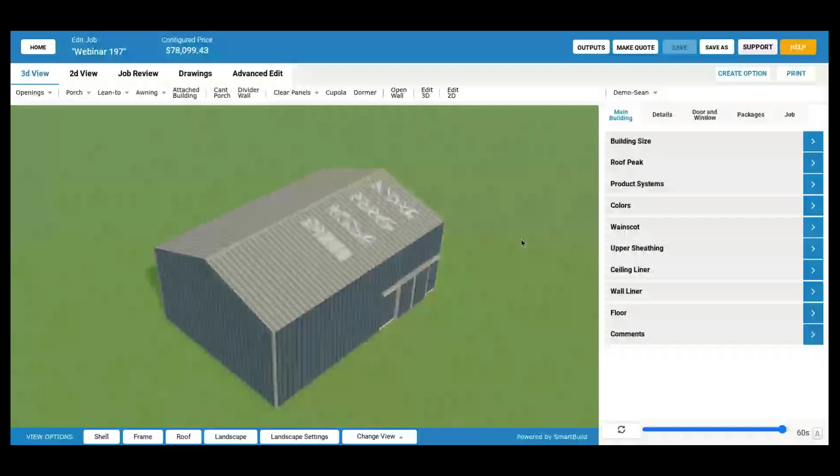All right, so I'm going to start in a job, and you can see a simple building here. I'm going to get out of this job in a second, and we'll go into the settings to see some important setup. The idea is to demonstrate these to you, but also to give you a roadmap to be able to set these up yourself.

Also, like Keith mentioned, this is on the beta site. I am on my beta site here. This is not going to be available to you on your live site until next week, and we'll keep you posted. If you do want to go into beta, you can do that right now and play around with this stuff on your site. You can see up here, it's the same address that you go to, but in front of it has beta. You should be able to log in like you do for your normal site. Just be really careful that you realize you're working on beta. Anything you do here is obviously not going to be on your live site, so you want to make sure to keep track of that. I'll demonstrate these a little bit. You can go play with these on beta, and then next week you can actually have these available on your live site.

As you can see here, I have some skylight panels. And if I flip this around, I do have some Eave Light clear panels as well. I'm going to show you how I set these up.

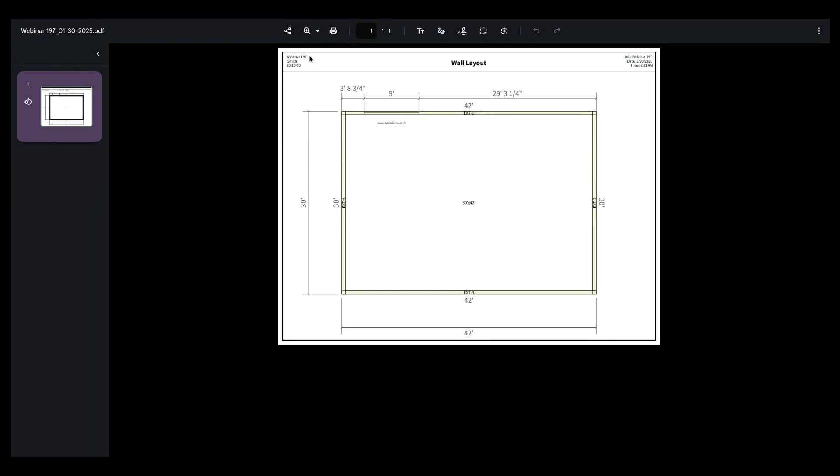This is the typical information that we've provided in the past: job name, the date, and the time. I just realized I kind of doubled this up, but this again is the project name. This here is a customer name, and this is the loading for this job.

So on the left side here, that information can be customized by you now. I'll show you how to do this in a second, but where those are coming from, I'm going to go back to this job. I'm going to go over to the job tab, and you'll see that this is the project name, that is the customer name, and this is the loading. So I went in and customized that particular wall layout to have this information show up on the left side. I didn't have my logo in there, but you can get your logo to come in there.

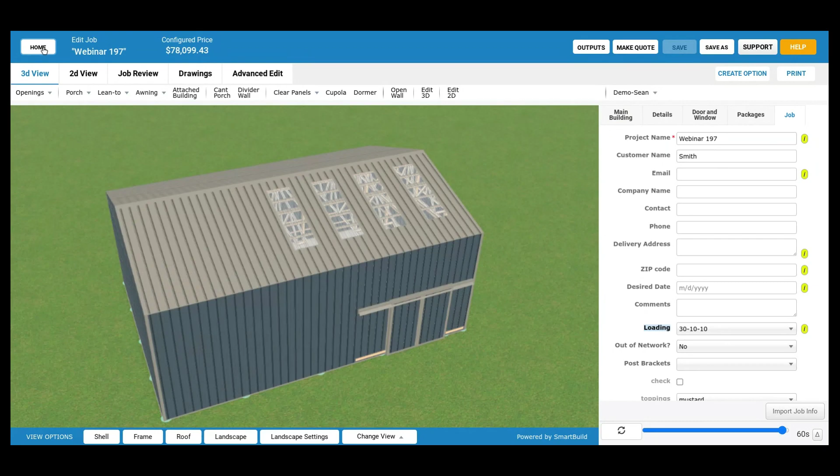So I think here in the job, I just wanted to do an intro and show this output. At this point, I'm going to jump into the settings so we can dig into this a little bit. You saw those clear panels, you saw the colors and the panels that came in there.

The way that you need to set this up to get those clear colors, it is a color. We have this set up so you can apply a color to a panel, and you can now have transparency as part of that color. So the first thing you want to do is add a color for this. I added in just two here, this bronze clear and then just clear.

And if we go in and edit this, this is the color code, just like we've set up the other colors. And then the new thing we have here is this color transparency. So 0 is going to be solid, just like it is for all the other colors, but you can go up to 100% clear. I did 70% in this case.

And actually, this clear panel here, that one wasn't quite as clear as I wanted it to be. So I'm going to change this to 85%. We'll see how that looks. You might have to mess around with these a little bit to get something that works for you, but you can come in here, create a new color, and define this color and the transparency. You can do that for any colors. If you have these already existing, you could change those up, just go and edit those, or you can add brand new ones.

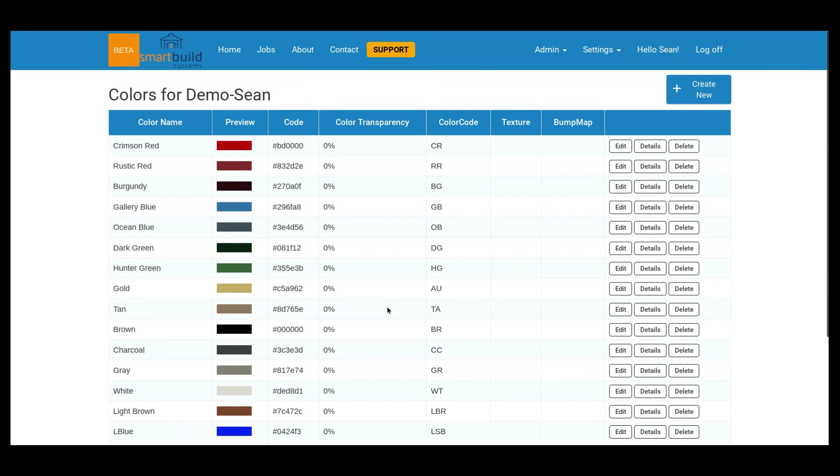Yeah, and I could have gone into the setup wizard here as well. So I'm gonna go into the setup wizard, and you can get into the colors here, same kind of thing here. You can put in that color transparency here and do some of the work here. You can also apply them to systems if you want to do that. So first thing you want to do is the colors.

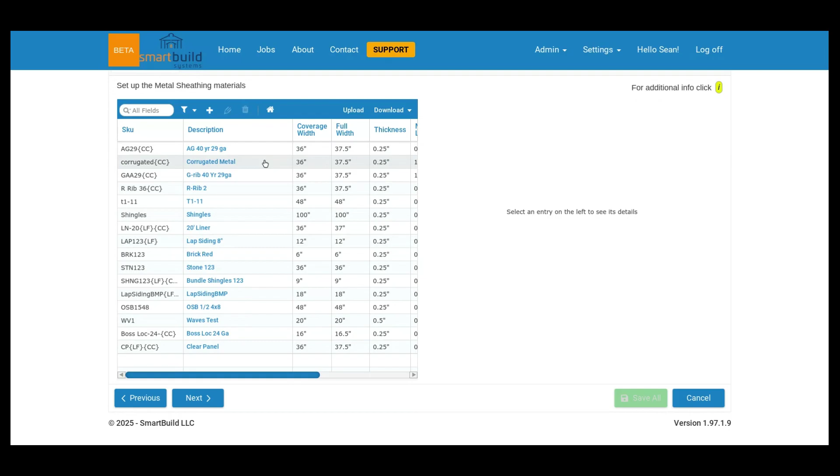And then if we get into the actual clear panel material itself, those are going to fall into the sheathing category. So I have some other sheathing materials in here, and you can kind of hijack some of these other materials if you want. You could add clear panels to your other materials that already exist. The thing you're going to run into there is you could add your clear colors as options to any of your existing panels. But what you're going to run into is if you go to set up like an Eave Light, you're going to have options of all the different colors and then probably some that you have that are clear panels.

So you can kind of just add these onto your existing panels, but probably what you want to do is I added a brand new material here, and I just did kind of a generic material clear panel. Just like any other sheathing material, I added this in as clear panel. Whatever you do, you probably have more specific types of materials and panels that you use, and you may have more than one of these. You can have as many as you want, but I just set up this clear panel as a lineal footage item. It's going to have colors, and it has the same coverage width.

In this case, I was kind of matching this up as a corrugated look to it. But it has the same width as these other panels, and that is going to be important. The widths of these do need to match up with whatever you're using for your roof or your wall. So I set up the coverage width, the full width, the thickness. This is just like the other sheathing materials.

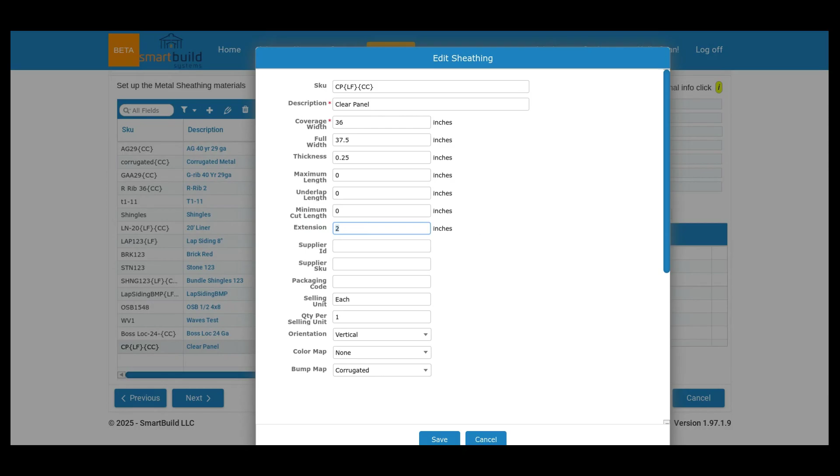And then it's going to use that in order to, in my case, I have a couple different panel lengths, I think 3 foot and like 11 foot for these panels. It's going to figure that as it tries to consolidate those into a panel that it's going to put onto the material list. So this is kind of like a margin, where you can kind of get some additional length for these beyond what the purlins are going to dictate. But I think we probably need to get more specific with those in terms of how far at the top it's extending and how far on the bottom. We probably want to get those into the 3D model. I know we have some work to do here, so we'll take a closer look at this, but that's an area that we're requesting some feedback.

The only other thing here is this corrugated look. You can put in different bump maps for the look of these in the 3D model, so you'll see that has a corrugated look once we get into that.

We also have usages specific to skylights and eave lights. For this specific clear panel material, I'm applying it to be used for both skylights and eave lights and none of the other stuff. That way, when I go to put in a skylight or an eave light, I'm just going to be looking at this material, and also these colors down here, which will be that bronze clear in one length, and then I have the clear in a couple different lengths here.

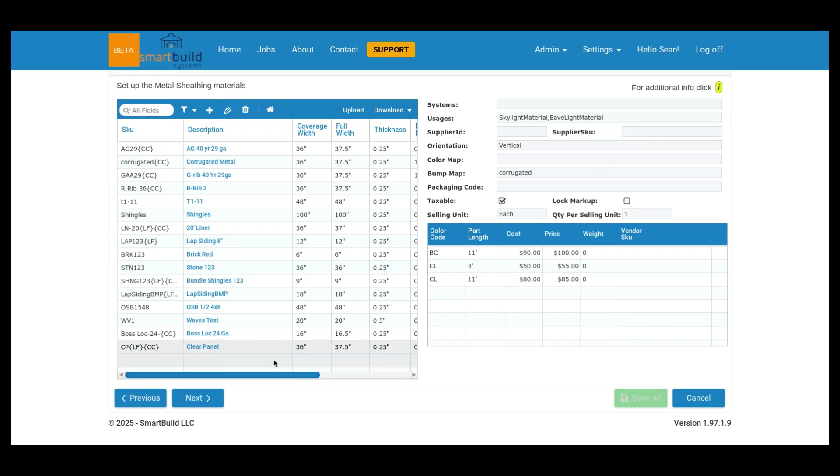So another thing to think about: you might need to go into your framing rules and set up some defaults. But the high level process here is you set up those colors, get some transparency, then come in here and set up one or more of these clear panel sheathing materials. Once you save all those, they will be available for you to use.

So that is the setup for the eave light and skylight. We do have a more detailed document, and we do record this webinar, so we'll have this available. When the time comes for you to get this set up, you can refer to this, and you can also utilize our support to help you get it set up.

One thing I'll do here, changing gears a little bit - I think I'm using this G-rib material. This is going to come into play with something I'll show you once we get back into the model, and that is automatically adding some purlins at a splice in the roof panel.

If you have a maximum length for your roof panel, in this case I just did 10 feet. Be careful with this - this is inches. It's pretty easy to cruise through this and put in like 10 feet, and then you'll actually get 10 inches and end up with a bunch of little panels.

The maximum length in this case for this one I put in here is 10 foot to demonstrate this. That means on a roof, if the length of that panel is going to be more than 10 foot, it's going to cut that panel off at 10 foot, and that's going to continue another panel.

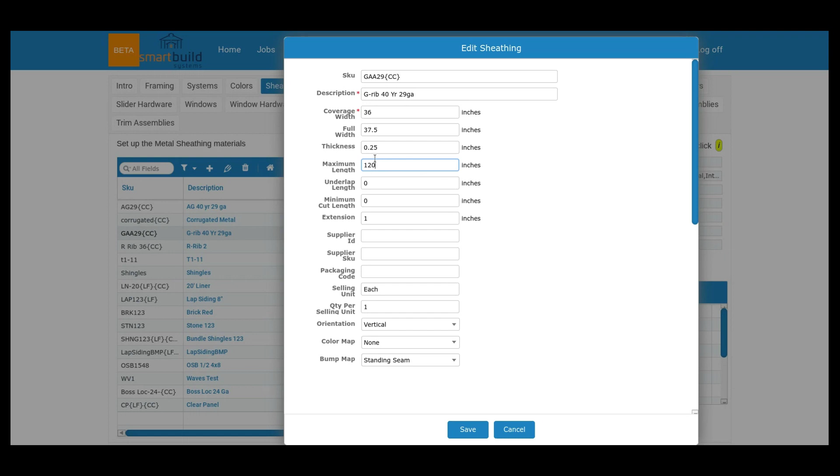That is available right now, but what we've done here is made it so it can automatically put in a purlin splice. So when we get into the job, you'll see that this panel is split at 10 foot, and there's going to be a row of purlins running across there. So while we were in here, I wanted to point that one out.

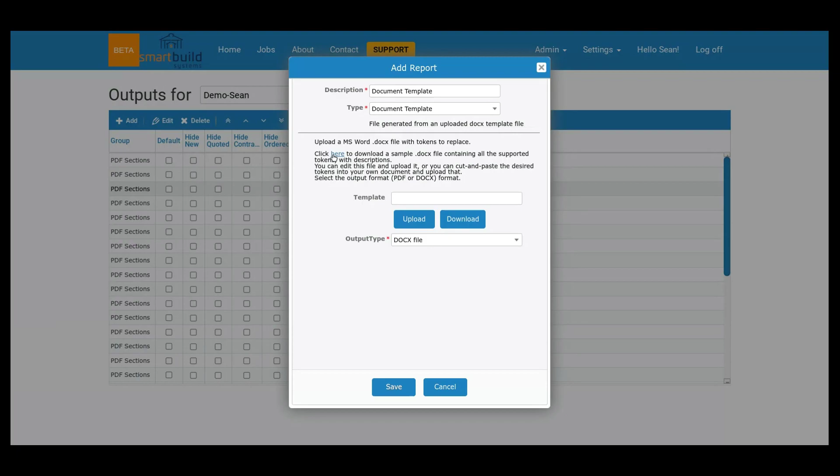I'll share this tab and you can just grab these and copy. Then you can come back over and I'll share this tab again. Once you have that document template downloaded and open, you can copy and paste those. I'll go back to the wall layout, and here are these three header lines where you can paste those tokens.

So I had that project name, which is probably redundant, customer name, and then I grabbed the loading. It showed the project name, the customer name, and the loading when we opened up that job. These are just going to fill in these blanks with job-specific information coming from your job tab. I didn't include the logo, but you can include that.

You can do a PDF or a DOCX file if you want, and you can do that for a lot of these drawings. I think almost all of these construction-type drawings—layouts, drawings, cross sections. If I open up the post layout, the same kind of thing is going on here. Even the elevations. So all of these PDF outputs can be set up to have that customized information coming from your job tab.

The one other thing I wanted to point out is that we had a request to make this roof report consistent with the other drawings, and so we did that. You'll see that...

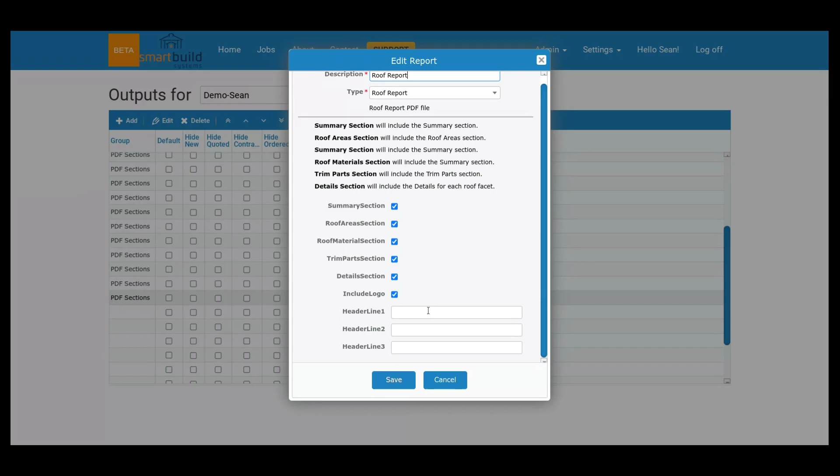If you don't put in these header lines, you're going to get what you got before—that was our standard information showing up on the left. Now, if you put in these header lines, you'll get those in the top left corner header, and on the right you'll get our standard information. So we've made all these layouts and construction drawings, including the roof report, consistent.

So thanks, Megan, for suggesting that. We cleaned some of that up, and then we gave you those job tokens in those header lines for some more customization.

I think that's going to be it here in the settings, so definitely a little bit of settings work required. I'm going to hit home, and then go back and edit this job. It's going to take a second to load up this job, load up the 3D model, load up all the pricing, and we'll get into a couple different things here.

One thing I'll show real quick is that purlin splicing for the panels. Okay, there we go. There's a kind of strange purlin line running across here, and that's from that panel length.

So there's just a new checkbox here. If you go into the details, this is optional—it won't affect you if you don't want to use it. If you're doing longer lengths or commercial-type roofs, you might want to come in here; it's this checkbox, 'add purlins at sheathing laps.' So when it's reaching that maximum length on the panel, it's going to throw in a row of purlins based on how your purlin is set up.

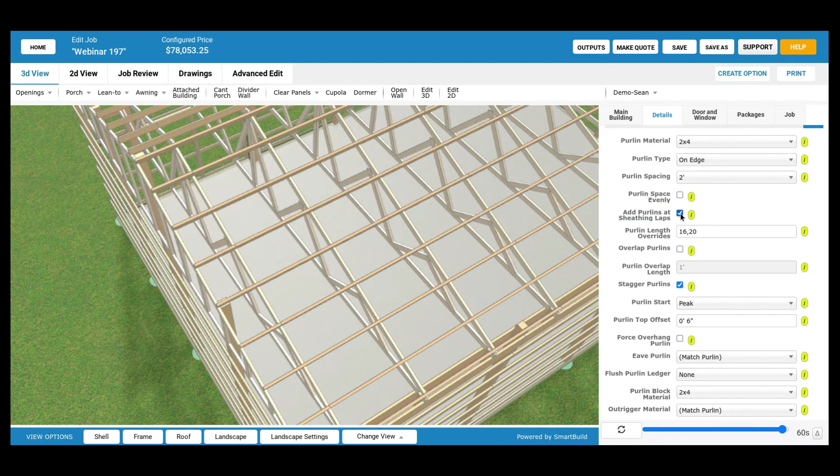If you turn that off, it's just going to get rid of that. If you don't use this or don't care about it, it's not going to affect you—you don't have to worry about it. But you might want to go into your framing rules and set this up as a default if that's something you run into. So just wanted to point that out real quick.

I think the other part I want to touch on real quick, before we get into the clear panels because there's quite a bit to talk about there, is just pointing out a couple things that we did with sliders. I think it's a smaller subset of customers, but it might be stuff you want to use. I don't want to spend a lot of time on this, but a couple things here.

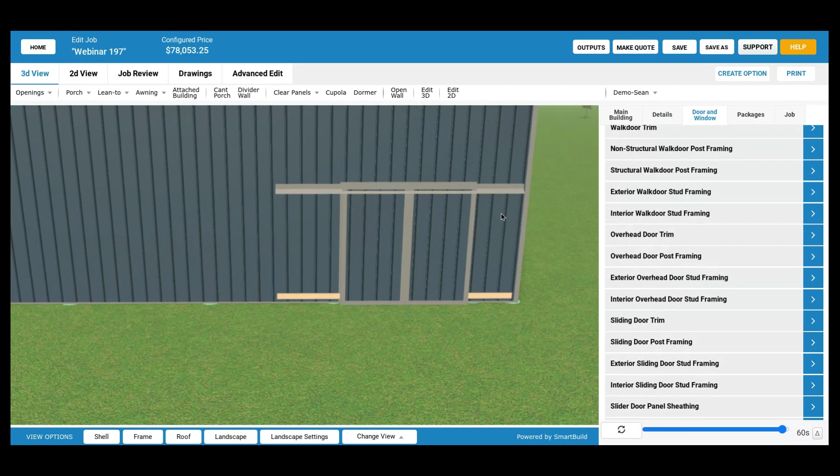One is we have a slider track margin. So if you get this close to the corner, we have the ability now to kind of hold this back. As you can see, it's a little bit longer opening this up over this way than it is this way, and maybe you're okay with that. Instead of extending this out or trying to figure it out, we've given you some control over the distance you can put here.

This is going to be under the slider door, or I think it's under the panel trim, so a lot more settings for you, quite a few settings. That is this distance here, called the exterior corner buffer length. It's just holding this back - that's 6 inches here. If I get rid of this, it's going to just extend that out, which is the way we do this now.

But if you do put in any sort of distance here, if you do 1 inch, it's going to hold that back 1 inch. And you can see that's going to affect the track cover as well as the track board and some of the other framing involved with that, so it pulled all that back. If you run into that situation, that's something you have some control over at this point.

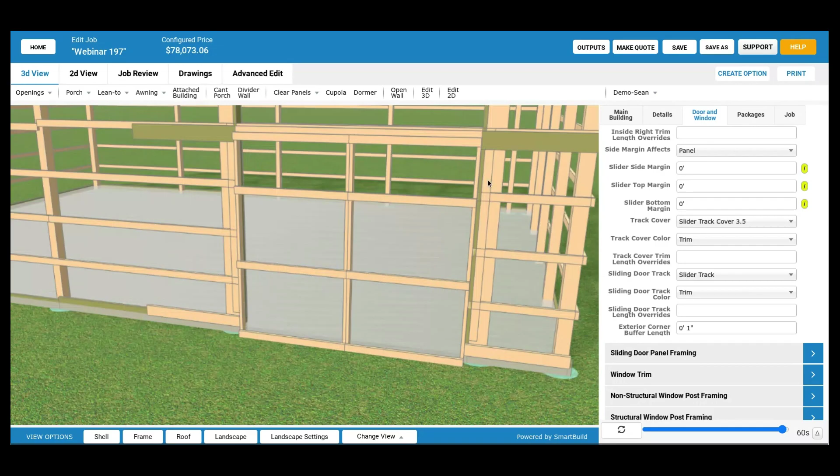The other thing that we did here is you can see I have 2 different materials here for this track board. So that is an additional setting that you can define if you want to have different materials at this location.

This is going to be under the slider door post framing. And if we come down here to track board, I have a 2x4 here, and then we have a track board extension, which is a pressure treated 2x8. Now we have these 2 different materials you can set up, with the lengths associated with them. So if you do have different materials here, you can set this up to automatically put in those different materials. That's just a request that we had.

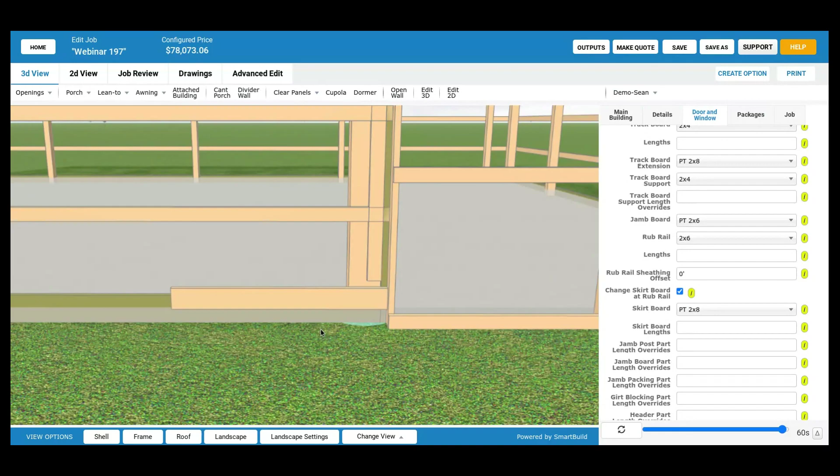The other thing, kind of similar here, still under the slider door post framing settings, is the skirt board changes. As you can see, this is at the rub rail specifically, where I have a different skirt board where the rub rail is at, though it is running all the way to the next support here. So I have a pressure treated 2x8 at the rub rail at this point, and then for the rest of this, I have like a 2x6 skirt board for the rest of the building.

So if you want to have a different skirt board at your rub rail for the support of some of the mechanics there, you do have that option now. These are things that you can go into your framing rules and kind of set up some defaults.

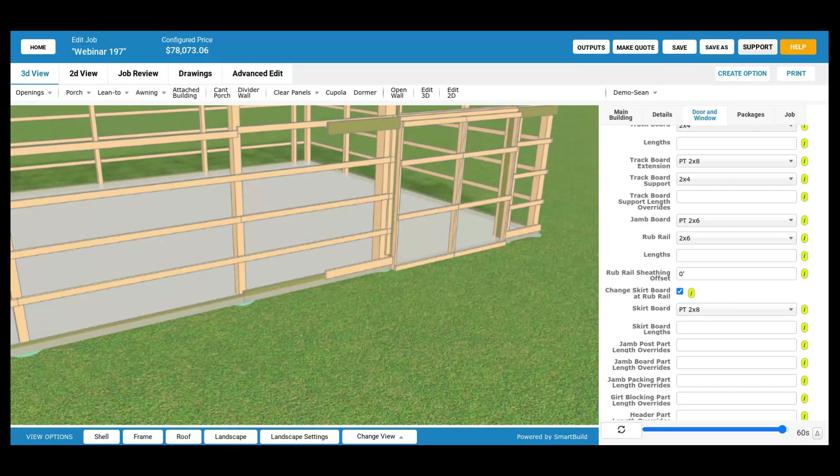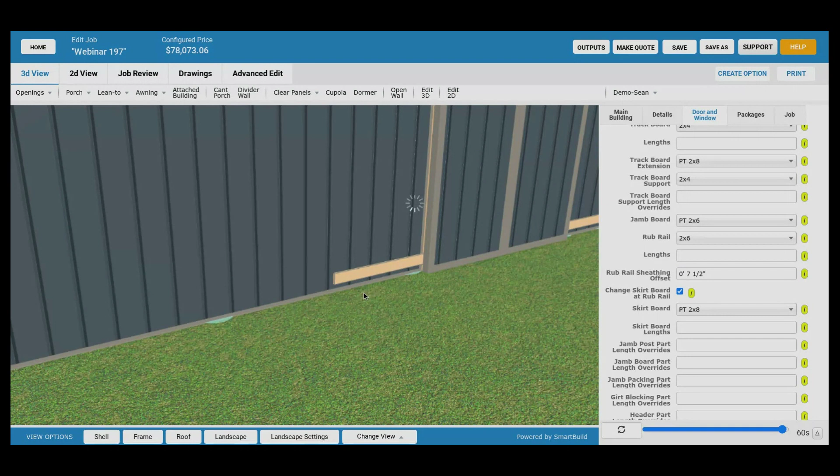Okay, last thing here on this is there is a rub rail sheathing offset. If you raise up the bottom of your panel at your rub rail, you can do that. So if we put in a distance here, then at the rub rail it's going to pull up the bottom of that sheathing. You can kind of see it pulled that up over to the top of that rub rail, so that's another option there. If that's something you do, you can set that up as your default, and it can automatically raise up the bottom of the panels at the rub rail.

And then you can see we have that board sticking out - you can turn those off. So I'll turn that off. We can see a little bit better here.

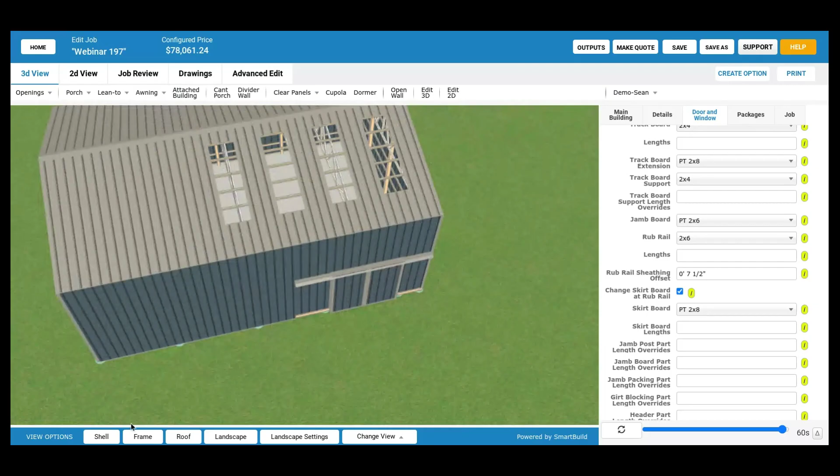And we'll start with the eaves. So there's a couple rules here. This is another area to get some feedback on, but we put both of these underneath the clear panels. So we have the Eave Light and the Skylight.

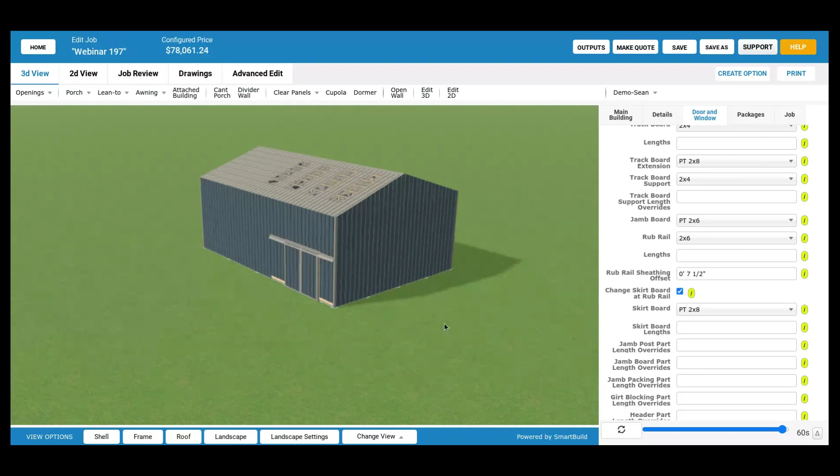The way that you input these is you click on whichever one you want to put in, in this case the Eave Light, and you'll see you get a note that you need to click on a wall to put these in. A little bit different than what we've done on the attached buildings. Also with the upper sheathing and the wainscot, it's a little different. You'll have to put these in as individual walls. That's an area where we can get some feedback and make some changes.

But the way this works now is you click on a wall, and once you click on that wall, you'll get these input parameters, and you see you get some sort of a preview. So right now on this gable wall, the defaults, it's looking at this offset down, and it is coming down 1 foot from that peak.

Doesn't necessarily make a lot of sense for the gables, but you can see when I put that as 8, it's going to drop that down 8 foot. The height is going to be this length of the panel from the top, where we've offset it down from, to the bottom of the panel. Right now it's 1 foot. If we do 2 foot, it turns into 2 foot. At 3 foot, you get a 3 foot panel, which is what I've done here.

Let's see, what would be the math on that? I guess I'm not really going to try to match these up right now. I brought that down below the truss carrier.

As you can see, I have that one material here of clear panel. That is the material we looked at in the setup wizard that I set up specifically for the Eave Lights and Skylights in this case. So you could have separate Eave Light and Skylight materials if you wanted, or you can choose none. And those colors are showing up here, that bronze and that clear.

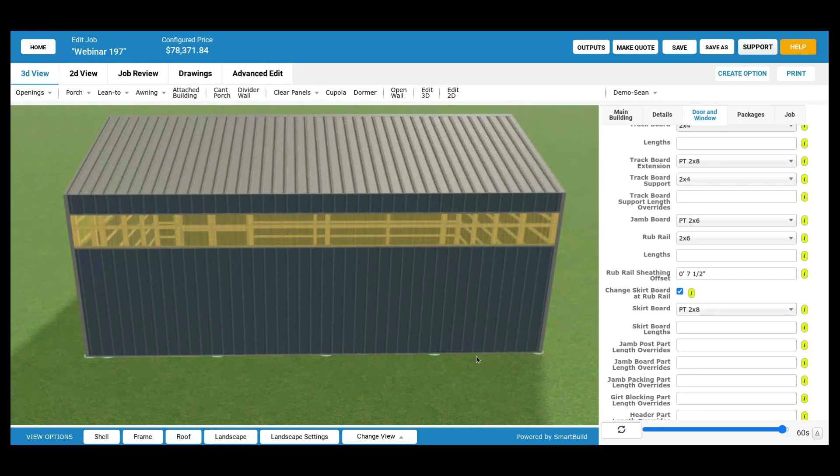In order to edit these, you can go to Edit 3D, and you'll see you get that as an option. There are going to be some situations on the roofs, mainly I believe where you get into a porch that has skylights, where Edit 3D can get confused, or where you have a couple different things that could be selected, like you could select that porch or you could select the skylight.

If I click on Eave Light here again, I can't just select this existing one to get into the edits. So you can either go to Edit 3D, or you can go into a specific Eave Light or Skylight to select those. That comes in handy on the porch where you have the skylights and you need to select that specifically. Something to keep in mind.

So when I hit edit on that, it does pull up the same input screen, and we can make changes here to this existing one. We have this full width checkbox, which means it's going to put it all the way across. That's what I did on that gable wall, but you can uncheck that, and then start to play around with where these get placed.

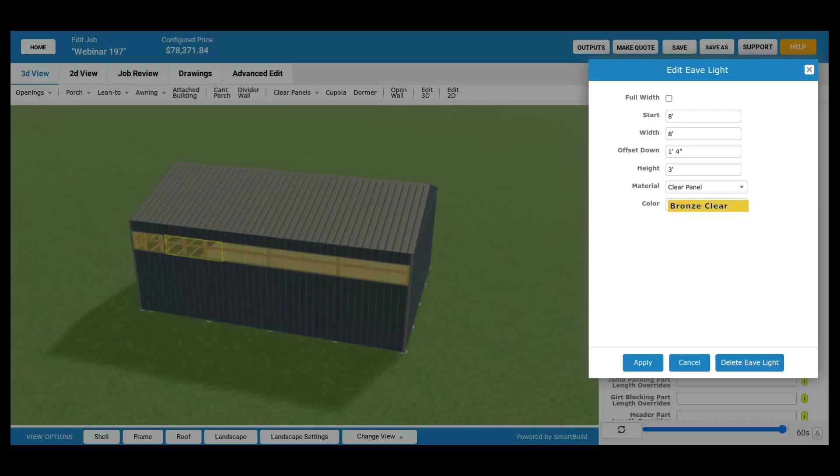And there are some rules. You'll see here I have this starting at 8, which is kind of the default, and we do get this preview. The thing about these starts is that they're going to be based on panels. So you cannot put an Eave Light or a skylight in the middle of a panel. It's following the panel breaks across the wall.

So if I put in something like 9, it will bump me over in this case. If I put in 1, it's going to put me all the way to the end of the wall because that's where the panel break is. A value of 1 wouldn't let me put it at 1 foot because it'd be in the middle of a panel. If I put in 2, it's also not going to do anything, because we're getting to the 3-foot panel width, that's where these panel widths become important. Now I have a panel starting 3 foot from the end, right at this panel break here.

The width is going to do something similar here. I have 8 foot that's coming across. If we put in like 9 foot, it's not going to do anything again because it's going to want to fall onto a panel break. So if I put in 12 foot, it is going to let me put that break there.

So you get these previews. The offset down here is from the top of the wall, works very similar to the porches. So you can really put that wherever you want, including 0. And then again, this height is the length here. We changed this to the height, so that's going to be like the height of this panel.

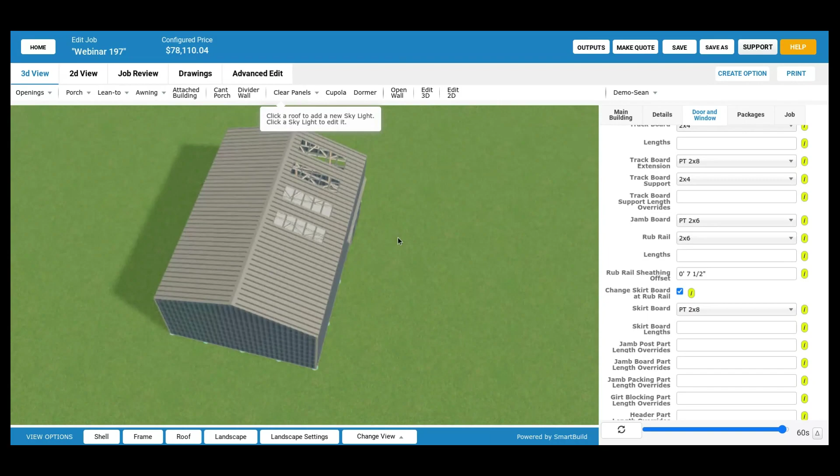For skylights, similar thing. You do have to click on a roof panel, and these are individual roof panels. If I click on that one, this gets more into purlins as well as the panel widths. On the walls right now, we are not limiting you in terms of where the girts are. That might be something we want to change. That's a place for feedback. Up here on the roofs, you are going to be limited by the purlins.

And so I have this offset down of 3 foot. Again, this is something where you may not see changes here. I changed that to 2, and the preview didn't change. I have 5 foot purlin spacing, I believe, here, and I have kind of an offset from the ridge. So it's looking at those purlins and it's going to kind of lock you into those.

So some things are just not going to change. Even if we do, I think like 4 foot, that is going to get me into a purlin. The height of these, again, this is kind of the height from the offset down to the bottom of this panel. If I put in 5 foot, we will see a change there. I think if we put in 4 foot, it's going to bump us back probably to this 3 foot length. So these are going to be dictated by panel, or by the purlins and the purlin layout.

And also by where these panel breaks are. So let's see, if I start this at 0, it's going to kind of bump me over here to get into that left edge of a panel. And then again, we have the materials, we have the colors that we could change.

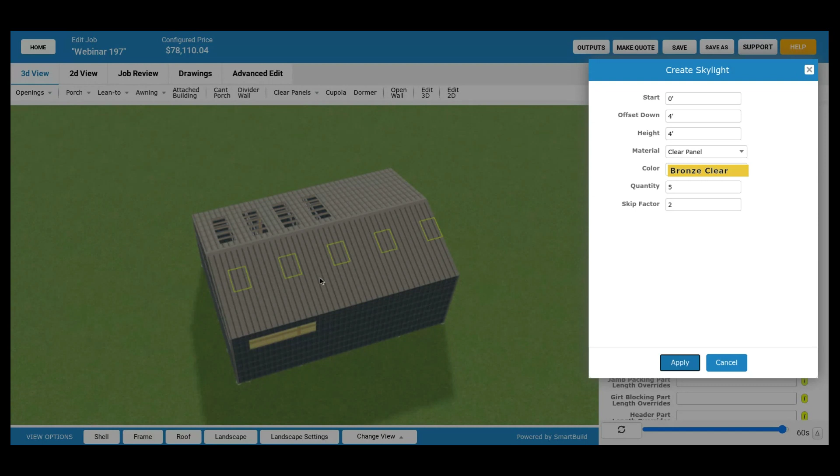And then once you get where you want it to be, you can hit apply, and it will place those onto the panels, onto the roof.

And then again, you can come in here and edit these either by 3D, and you do have to edit these as a group. That's just the way it works. If you click on this one, you're going to be editing all of these. So that's another area where you could potentially make some changes if you do need individual changes for these panels. We really don't have a way to do that right now. These all work as a group.

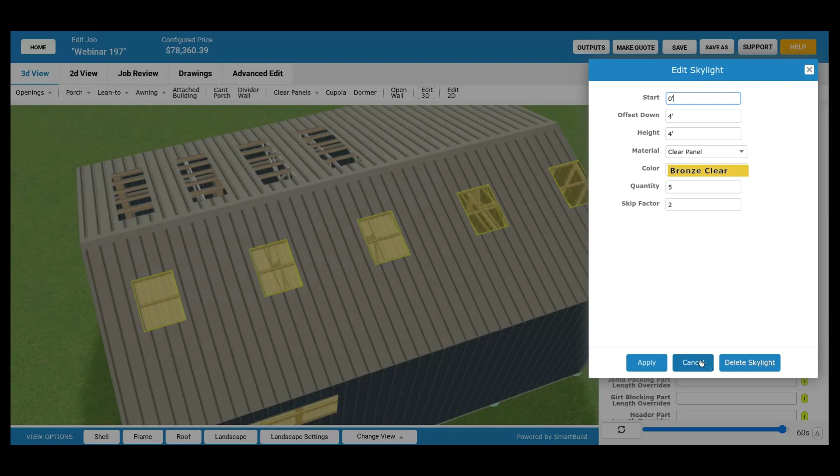You can put in multiple groups of these on a roof if you need to, so you don't have to just put in one group if you want to do some different things here. That would just end up being one or more groups of these panels with some different settings associated with them.

In this case, because I messed up my clear panels, I think we could go back and fix those. But if you do want to delete these, you edit them, and there's a delete skylight option here, and then it'll just ask you to delete those.

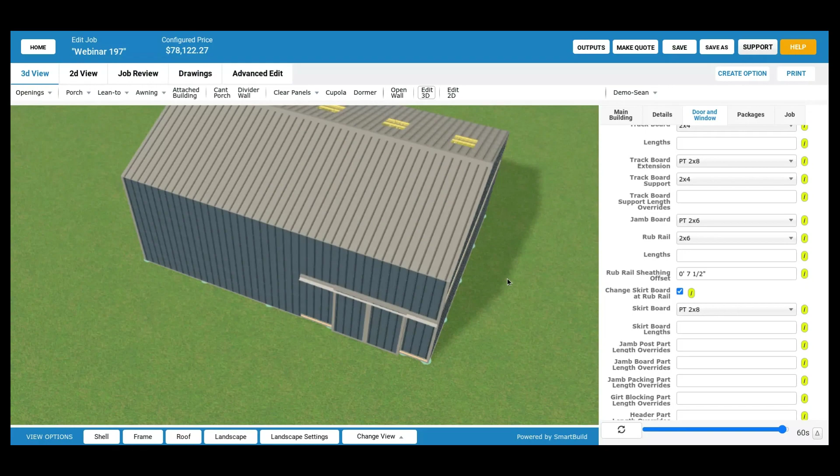So Sean, we did have a couple of questions that came up with respect to these skylights. Marlon asked, does anyone think it would be beneficial to add a control to easily line up the clear panels with other walls? I think what he's talking about is the issue you had trying to put the clear panel on the gable wall that lined up with the one on the eave wall.

Yeah, it's because we're offset from top. Marlon said matching the height on different walls.

Chris suggested having an offset from grade option would be best instead of offset down. We did offset down because looking at the buildings we saw, the eave lights tended to be up towards the eave, some distance down. It didn't seem like anyone was saying, 'Oh, I want these to be 12 feet from grade.' No, they wanted it to be 1 foot down from the top. That's where the eave light starts, and it's 2 feet high.

But having said that, we don't do this, you guys do. So like Keith said, we are very much driven by what you guys need. So that'd be a nice option there, from grade. Well, is it an option, or is it, no, change it from offset down to offset from grade?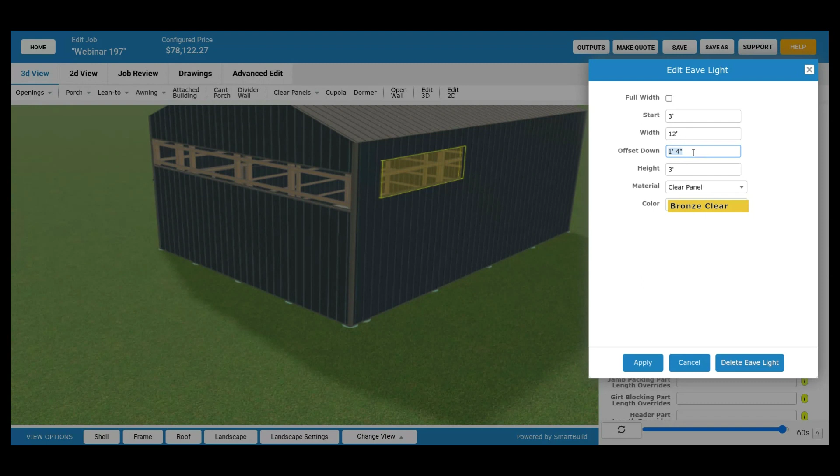Then they would all match. Can you set the offset down to be from the eave height instead of the peak? I think that's kind of what had been proposed. Bart says, can we have both offset down and from grade?

No, pick one. Of course, you can have both if that's what we need. If the prevailing sentiment is that it was always offset from grade, then we would change it to that. If the prevailing was no, it's always going to be offset from eave, but it's the same eave all the way around the building.

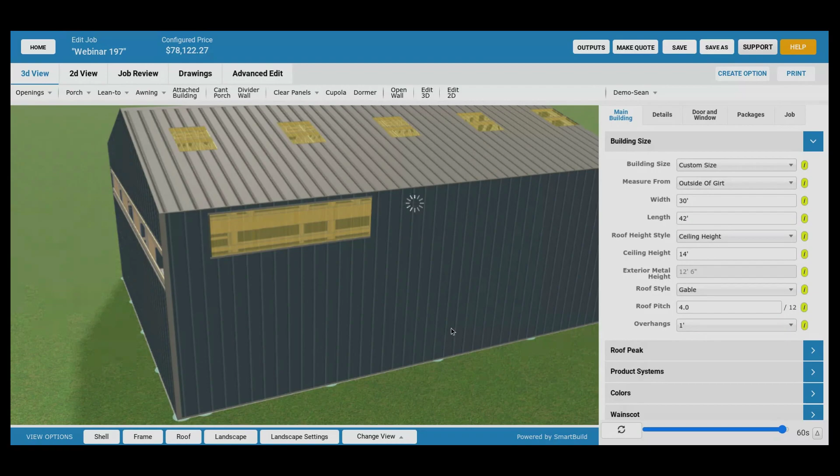I don't like giving you guys choices. So I think the offset from top of wall would be the best option because it's something you could set as a standard and you're not having to set it per job, the height. You have a building that was height. Yeah, that's why we went with offset down, because it just seemed like from all the pictures that we saw, the eave light is always some slight distance down from the top of the wall metal, and so I think that makes sense.

If we could just set that on the gable, the offset down would come from the short point of the gable or from some matching eave wall height.

It seems like when you have an overhang, it should be offset down from the top of the steel, and it doesn't look like it is. Is that right, Sean? Right. Well, no, it is from the top of the steel.

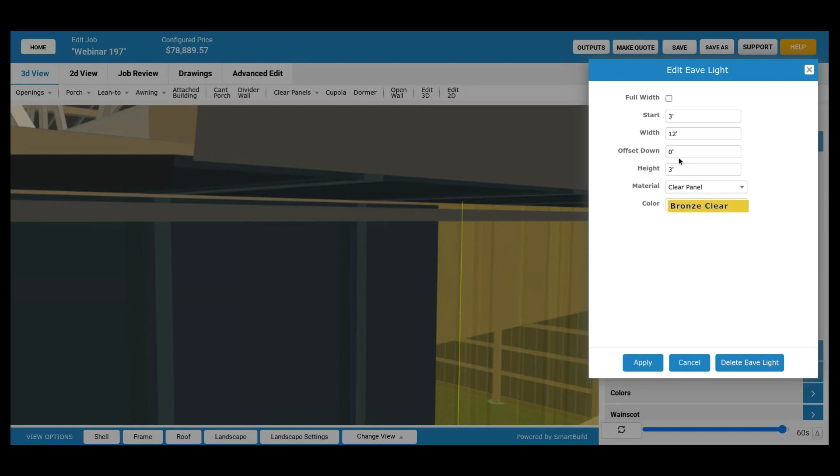Well, if you edit that Eave Light and set the offset down, what is the offset down on that Eave Light? It's 1 foot, right? It's offset down 0. Set the offset down to 1 foot, and maybe we were smarter than we thought.

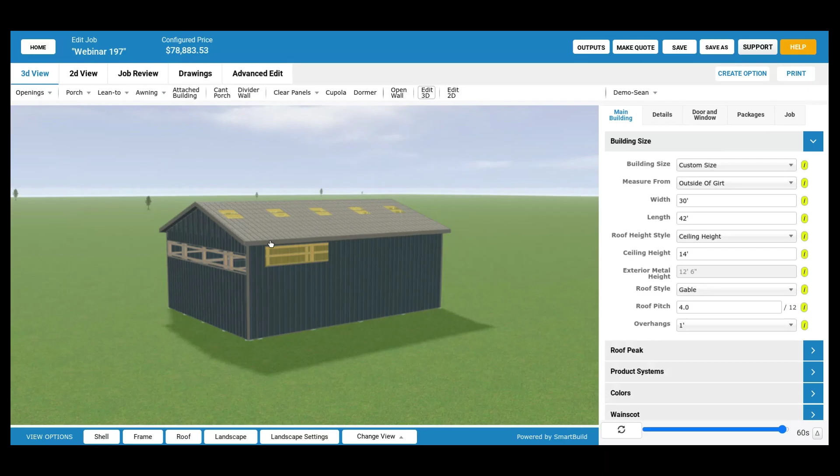Irvin is going back to the first girt down from the ceiling height for the top of the side light as our preferred position. If you do an offset down of 0, it should put the top of this eave light at the bottom of the overhang, or the top of the eave if you don't have overhangs.

I would definitely like to see it at the top of the wall sheeting. We typically put it at the top of the wall sheeting, and if we have that set at 0, then we put a 3-foot panel in. It's going to give us a 3-foot panel at the top of the wall. With a different fascia height or anything like that, it's going to change that offset. So I think top of the wall sheeting would be the target.

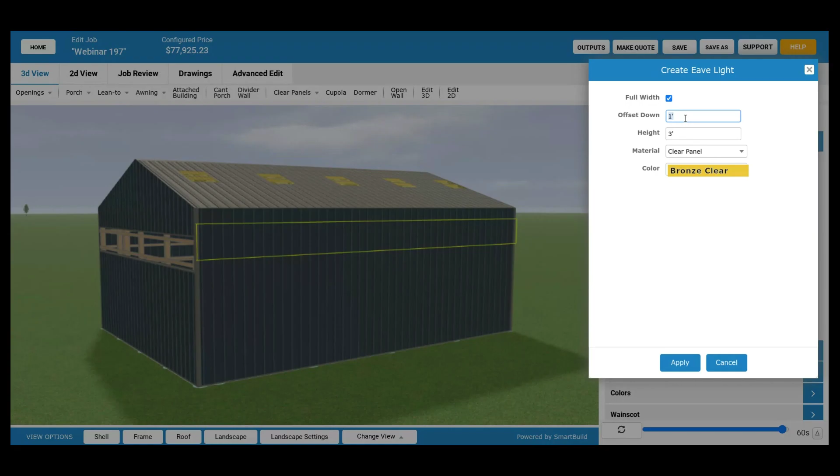Top of wall sheathing, yeah. Top of wall sheathing. Where that gets a little funny is if you do that and you have an overhang on one side and no overhang on the other side, you're going to have the wall light in a different place. So that sort of breaks the idea of doing it from a consistent place.

Where is this coming from? I expected this to be at the top of the steel. Where is that 0 from? Looks like something we probably have to look at. We'd have to look at it.

This is beta, yeah. This is why it's in beta, right? It's not the top of the truss carrier. It's not half ceiling. It's not the ceiling, so I'm not sure where it is.

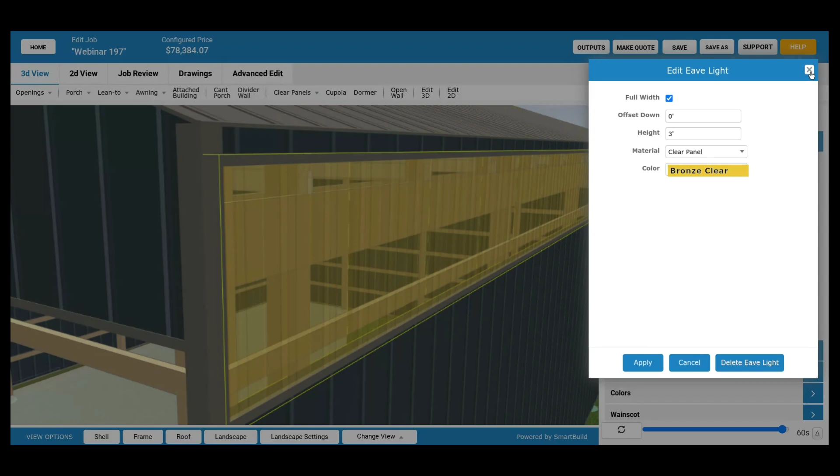Yeah, that looks kind of like a bug. So we would want to be consistent, and you'd want to be consistent on the eave wall with that. The tricky part is if you had an overhang on one side of the building and not on the other side.

On this side of the building, your offset down 0 would put you there. On the other side of the building, offset down 0 would put you down by wherever your soffit return is. And then on the gable side, which side should it match?

Something to think about. So like Irvin said, offset from grade would work best for him. That's what I've been doing with upper wall sheeting - offset from grade, and then I can place it at my first girt below the truss carrier.

Yeah, that makes sense, kind of like the idea of having both. Mark, it sounds like you don't like that, but... Well, yes and no. They both have problems, right? Offset from grade is really simple, it just means that for every wall you put in on every building, you have to scratch your head and go, okay, what do I want the offset from grade to be for this one?

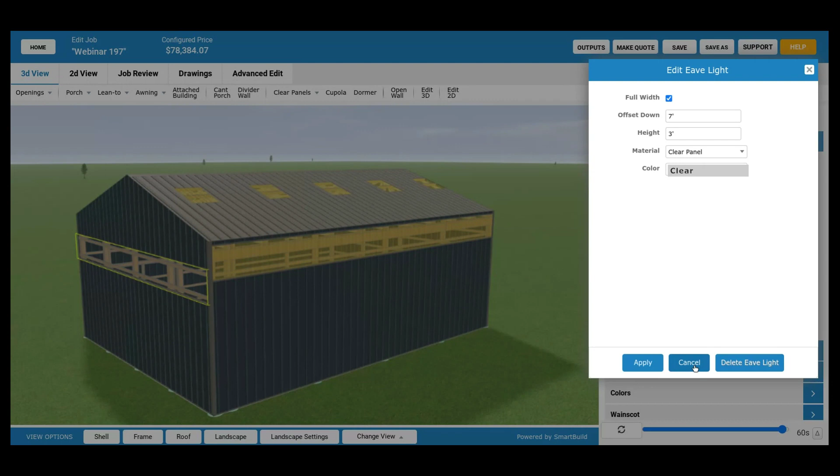And then we might have something with the gable. Or maybe that just falls under the offset from grade, or maybe something to match the eave wall. Yeah, then it gets a little bit fuzzy, because if your eave wall is top of metal, and the top of metal is different from the left eave wall and the right eave wall, which eave wall do we match?

Yeah, okay, I guess we're getting into a design session here. It's fine, I mean, I was done with what I was going through, so this is kind of the official time if anybody wants to jump in or whatever you guys want to talk about. We can definitely keep talking about these.

Maybe you should do a session and just invite people and go through some of these kinds of things. So we've got Irvin saying they always line it up with the girts, and Casey saying it'd be nice to not be pigeonholed to line up with the girts. So we've got people voting for both.

It sounds like if we had those three options for Eave Lights - the offset down, like we have now, but making it work correctly so it's always offset down from the top of the steel. And then offset from grade, so 9'6" - you want 9'6" all the way around the building, now you can make it consistent, 9'6" all the way around the building.

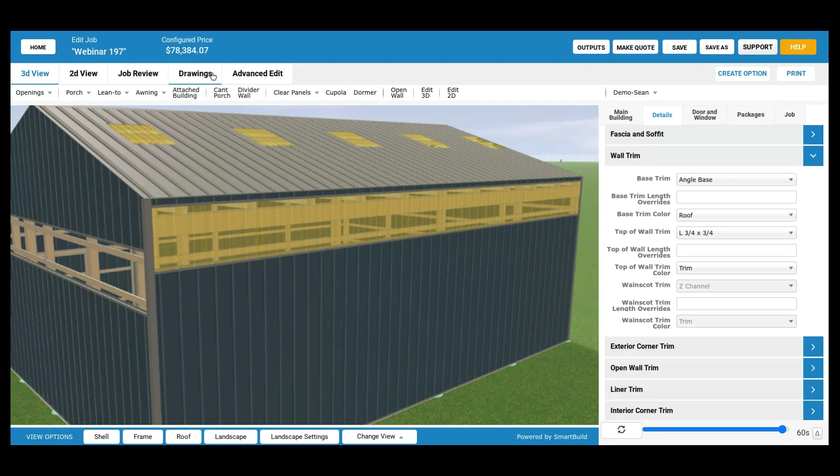If you don't have wainscot on a wall, you have some control over trim. But do we need an eave light trim, an upper and lower eave light trim? Yeah, I think we do. The problem is if you have wainscot on this wall and you want trim, but you also have eave lights, and if you don't want trim, some people don't use trim here. You can't have no trim up here and then wainscot trim elsewhere. So right now, if you have wainscot, you have to have wainscot trim up here, and you're limited to matching the wainscot trim.

So as a follow-up question, is it reasonable to assume that you're going to use the same trim for the eave lights, both top and bottom, as you use for the wainscot? I think in some cases, but some people don't use trim at all on the eave lights. Anybody can chime in, but as Brandon said, I would keep the trim the same as whatever you're using for the wainscot.

A long time ago, a lot of guys would sheet the entire truss area with eave light panels on the gable, especially in a horse barn.

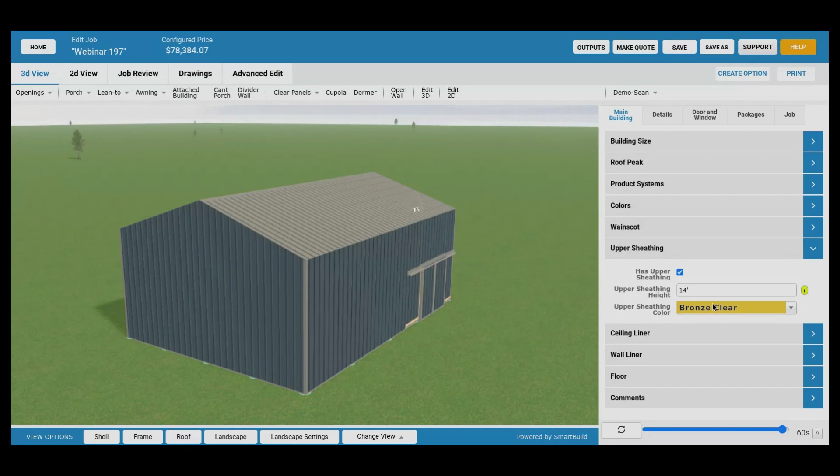What we do is you can take that clear sheeting, put it into your material colors, and for your upper sheeting, that would be your material that you use. Upper sheeting color is clear, so you could get that effect. Yes, you can get that effect by just doing upper sheathing and changing your upper sheathing color, or your upper material. I have those colors with these other panels, I think. So this would give you what you asked for there.

Realistically, for eave lights, if your eave lights are always at the top of the metal and you want offset from grade, then upper sheathing height does give you that capability. You could use that color for any of your panels as long as you're in the right system, you have the material set up and the color set up. So you would have to make sure that system you're using, whether it's G-Rib or whatever, has a clear panel that you can buy. Does that make sense?

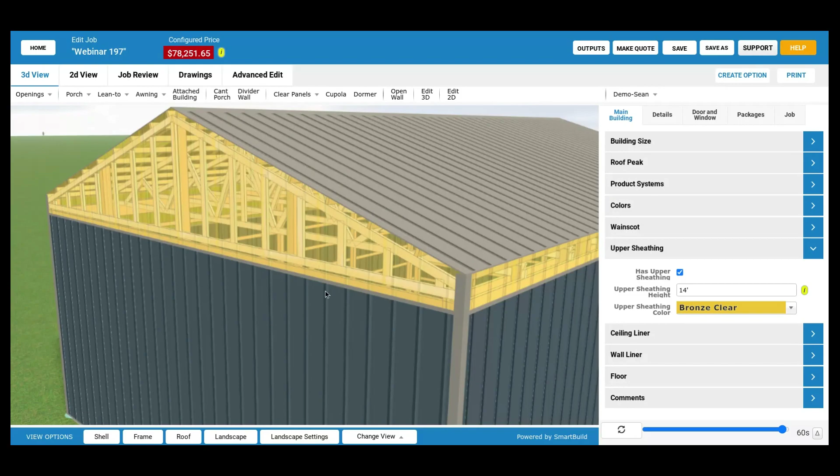One of the questions from Delmar is, what trim do we use on that upper sheathing? I don't know that we have an upper sheathing trim, do we? I think it's again the wainscot trim there. Well, we call it upper sheathing trim, but what are we actually putting in there? Do we have a setting for it? Go to details. It is controlled by the wainscot trim. Yeah, we just call it upper sheathing.

So is that a vote for a separate setting for upper sheathing trim, separate from wainscot trim? Yes. And the reason I say that, if we have a building with three colors, like a wainscot is one color, then your sheeting and your wall trims are a different color, you have the ability to set that upper sheeting trim to match the wall instead of the wainscot color. Who cares? Actually, we can't, because when I select that wall and change the wainscot trim to match either the wainscot or the wall or whatever, I think it needs to be controlled separately. So that's a vote for separate settings for wainscot trim and upper sheathing trim.

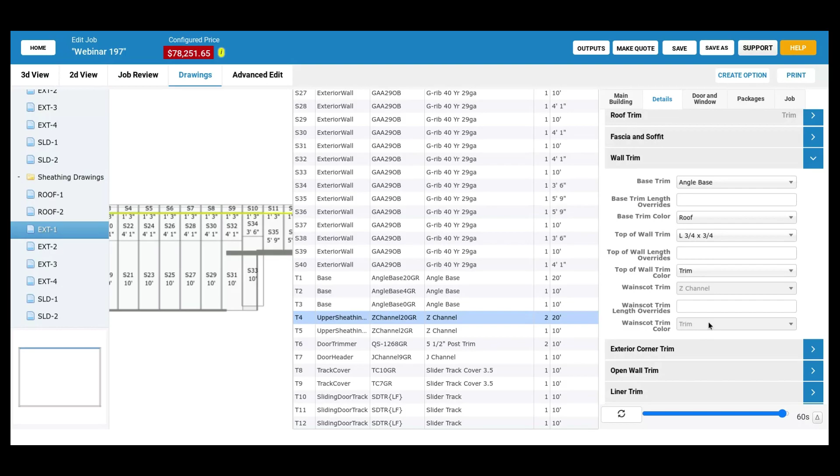So what I'm hearing is, as far as offset from grade, we have a solution for that: just use upper sheathing. You can select your clear panels as your upper sheathing panels, and that would allow you to get this effect. Now, if you wanted that upper sheathing band to go the same three foot height or whatever around the gable, you couldn't use upper sheathing to do that. You would have to calculate what the correct drop height is.

Not sure that comes up often enough to spend too much time on it. I think what we need to do is make sure that when you say offset down 0, it actually does offset down 0, and not give you this kind of mess. This is giving you both, and then...

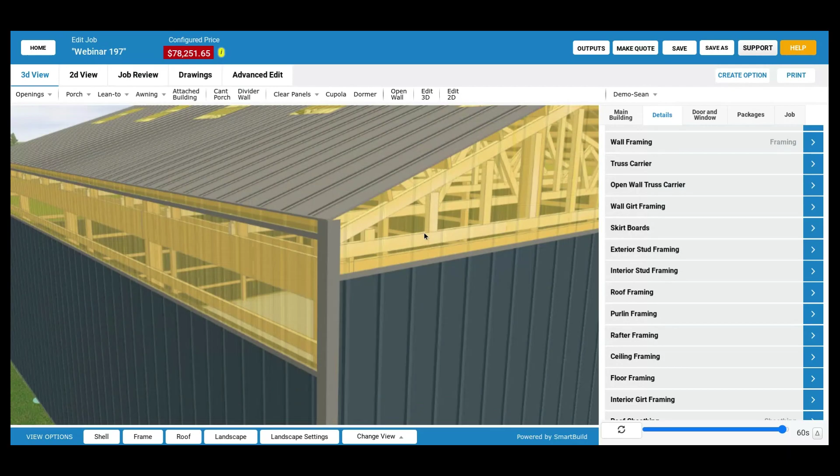It sounds like we also need a separate option for upper sheathing trim, like wainscot trim, and another one for Eave Light trim. Would it be the same trim on the top and bottom of the Eave Light, assuming it wasn't all the way to the top? I would say so. Brandon said just use the same trim that you use for wainscot, and that kind of sort of works, but not really, particularly when you have stone wainscot.

Yes, I think we can get this much better. I don't think that we're going to answer all of these questions, but I think we can get it to where it's going to work for 90% of the cases that people want to be able to use it. The other cases, they might have to scribble on a napkin or something to get the right stuff.

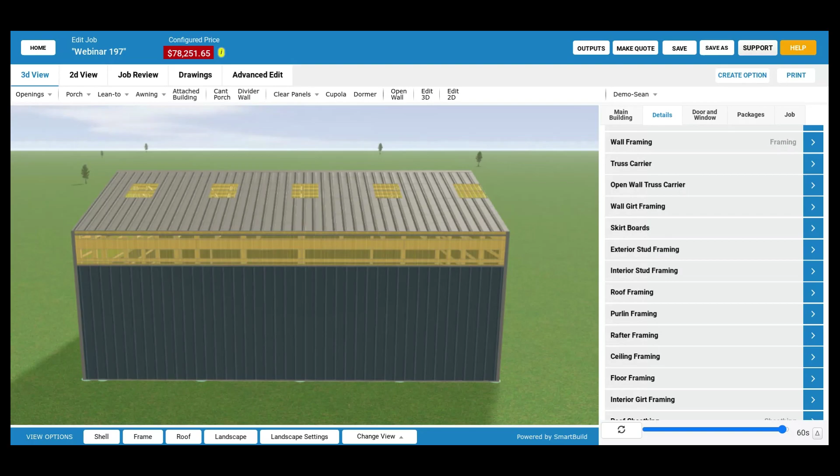The only thing I would add is on the Eave Light, if we have an 80-foot long building, and a 20-foot door in the middle of the wall, and that upper wall is full of header, it would be nice to be able to cluster the Eave Light similar to what you're doing on the roof, to apply 2 groups of Eave Light instead of a solid band. So you can group Eave Light on the left of the door and on the right, and not in the doorway.

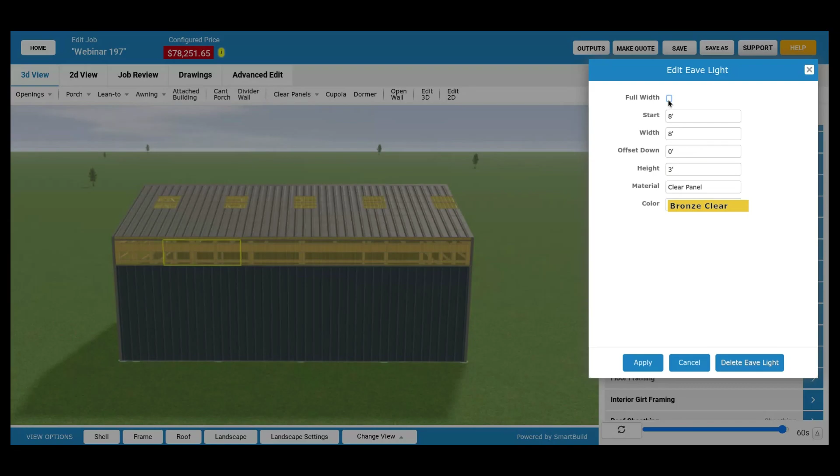We don't have that ability, but you can add 2 Eave Lights on a wall. You say 8-foot Eave Light on this side of the building, then a start point, and then an 8-foot Eave Light on the other end of the building. So your start point, full width checkbox, that's at 0. Then another Eave Light start at 16 for 8 feet. You got it, I missed the checkbox. You just have to do it as 2 separate ones.

You can also put an Eave Light at offset down 1 foot and then 3 foot high, and then another Eave Light offset down 8 foot that's 3 feet high. So you can do some really silly things with your Eave lights, but multiples that way. But remember, you're not going to be able to get things exact. It's going to be based on your panel widths.

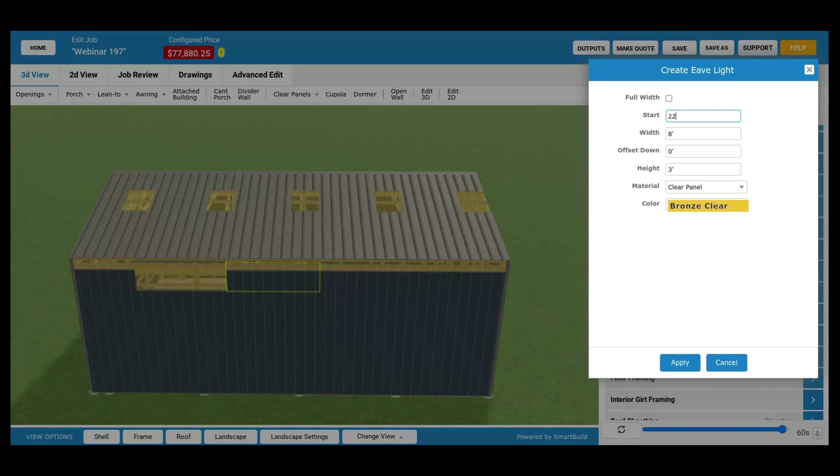Just so you know, I want it 8 foot here. Oh, it's not 8 foot, it's hanging over the door here. So you'll have to do some playing around based on your panel widths.

Yeah, because basically when you say I want an Eave light from here to here, what it does is say, all right, starting here and ending here, you're going to be able to see through the panel. Where do I start? Where's the first panel that has to be made clear, and where's the last panel that has to be made clear? Because what it does is it just makes the panels clear.

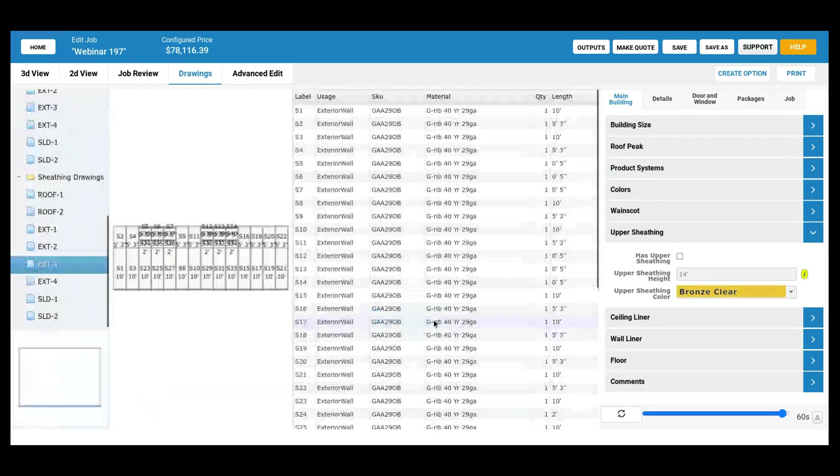So when you go to the drawings is where you can see it. If you go to the sheathing drawing for EXT1, EXT3, you can see what it did: S12 is what it was. S12 got broken into S12 and S30, and then S38 is the section, the 3 foot or 11 foot section in the middle. The 11 foot is the length, that's his panel maximum length, the panel length.

Just so we know, with that 3 foot section in the middle, it's cutting it out of an 11 footer. 4'2", yeah, so 4 foot was the height, and then you had the 2-inch extension. So 4'2", 4'2", cutting those out of there.

But yeah, back on the drawing, the dimensions you gave it were actually somewhere in the middle of S38, and somewhere in the middle of S38 to somewhere in the middle of S40. That's where you said you wanted your Eave light to start and stop. So somewhere in there is where you requested, and this is what you got. Hopefully that will help.

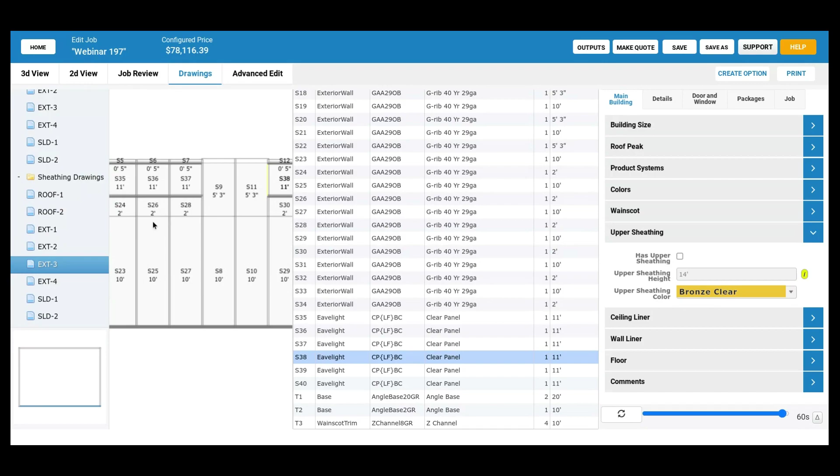Let's see, we had a question from Benjamin Oikel about changing the markup on starting models. I would reach out to support on that one, Benjamin. That's not really an issue that I want to talk about here, but support will definitely be happy to help you with that kind of question.

Chad asked about anyone having issues using the cant porch detail and then placing windows. We did have some issues with that which we've addressed in this sprint. As usual, we don't always talk about bugs we fixed in a particular sprint, but we did fix some issues with this sprint, and some of them had to do with the placement of windows.

So I would encourage you, if you're having issues when doing those kinds of things, to reach out to support and let them know what that is. That dramatically increases the likelihood that they will get fixed if we know that they're a problem.

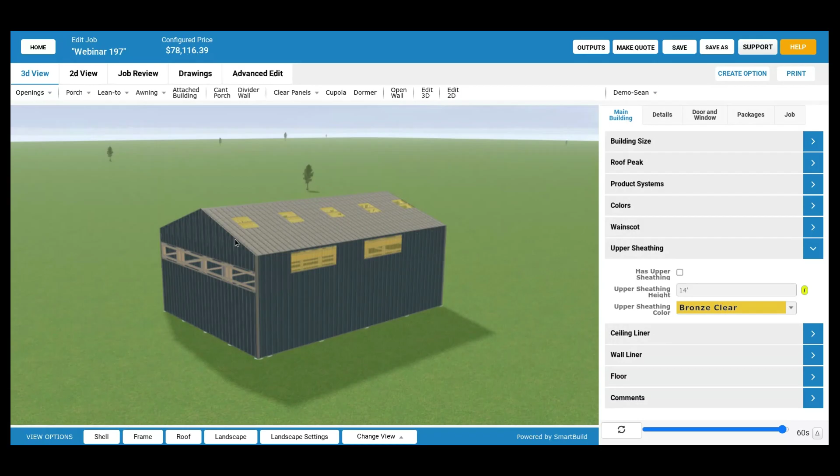Let's see. Yeah, I think we've exhausted that stuff. And for eave lights, we are going to make one change at least, which is to ensure that when you say offset down 0, it actually is offset down 0, whether you have an overhang or not. Looks like it's not, so we'll have to get that figured out.

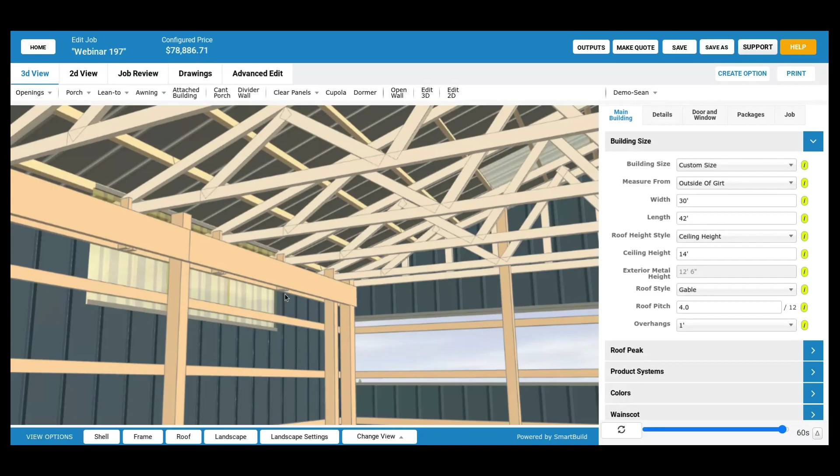And then we have half of a request for an eave light trim. We had several people say just use the same thing you use for wainscot. So in the interest of getting this thing out, we will continue to use the same trim we use for wainscot, both for the eave lights and also for the upper sheathing trim. But we do have a vote for additional trim types for both of those in a future release.

Irvin asked about first girt down from ceiling height for the top of side light. I think the best way to address that is to just know that you've got 3 foot girt spacing, so the offset down is... not great. Irvin, I don't really have a good solution for that particular issue other than pull out a napkin and do some calculations to get it in there. But adding an option for the eave lights to be able to say, no, honor the girts, is something to consider.

And it's more than just doing it at the first girt down. It's things like, if I have 3 foot girt spacing and I say I want an eave light that's 2 foot high, then that means either it's going to be 3 foot high so it runs down to the next girt, or it's going to be 2 foot high and you're going to have an extra girt placed in there, kind of like we do for a wainscot girt. So there's more discussion and grooming we need to have about that, and figure out what we need to do. A lot of feedback from customers is what we have to rely on there.

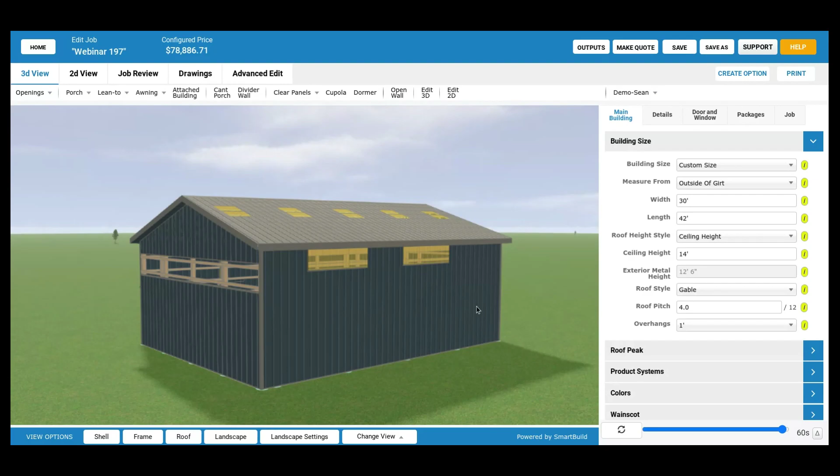Oh, here's a question we can answer. Kyle Hahn asked, is there a way to add more accent colors and be able to name them? There is, we already do. We have 4 accent colors. You only get 4, but you can name them.

So if you go to... you want to show them how to do that, Sean? Sure. Because I'll save. So let's see here, is that framing rules?

Go into your framing rules, and once it loads you can go down to colors. Hit the E for edit. And I think he said walk door trim.

Click save. Then what you probably do while you're in here is go to door and window, go to walk door, and walk door trim, and set that header color from trim color to walk door trim. There it is. And then trimmer color to walk door trim, and top jamb color to walk door trim. Basically set them all to walk door trim. Is that what you were talking about, Kyle?

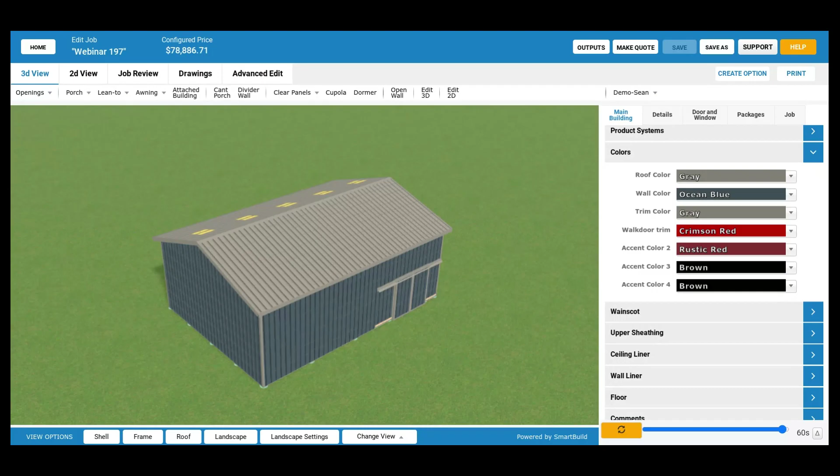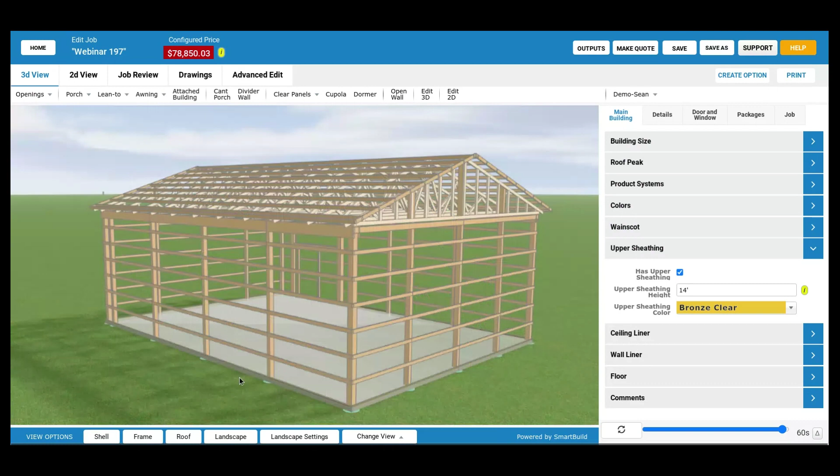We should probably, in the interest of completeness and complete flexibility, give you the ability to say no, I want an upper sheathing girt. And you can set that to same as wainscot, or you can set it to same as girt, or you can set it to none, or you could set it to a particular material, and then give you that same flexibility for the eave light girt.

And if it defaults to none, you get what you're getting now with this release as soon as we release it—you'll get, oh well, there's no girt there. But then you would be able to set that to some material.

And I think it makes sense to address that girt material, the sheathing break girt material, right? I would agree with that, same as all of those guys.

I think that's a good approach, Mark, because anytime you do a metal splice, you have to have a supporting girt behind it. And we've even had requests already to have a larger type of girt used there, which I know gets into another conversation probably, but I'm just pointing out that to specify a specific girt for a splice, I think would be a good approach.

Yeah, and so there's a wainscot girt, which is the girt at the splice between the wainscot material and the siding, and we currently also use that same material at the splice between the main siding and the upper wall sheathing.

And what we're proposing is, no, we're going to give you control over that. We're going to give you a new question, which is upper sheathing girt, which is going to default to same as wainscot girt, so you get the same behavior you get now. And we're going to give you another setting, which is eave light girt, which will default to none to give you the current behavior you're getting.

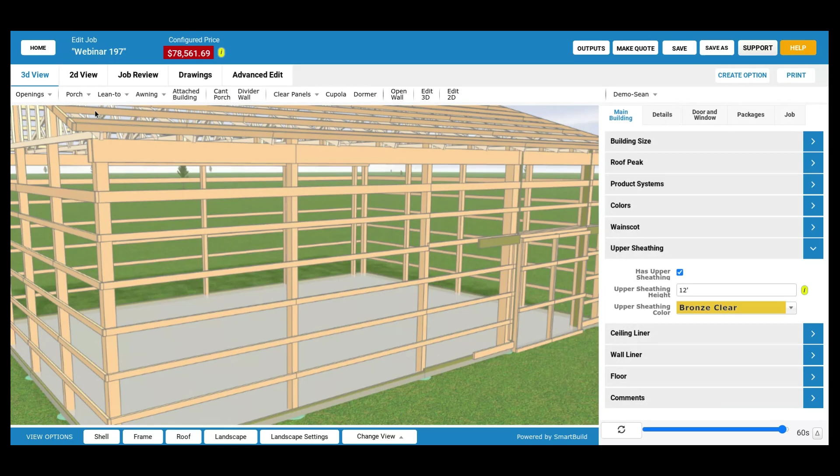Really quickly, Marlon had a question. So you're saying there is currently the ability to hide the unused accent colors. And yes, there has always been the ability to hide the unused accent colors. If you go into the framing rules, you can hide any of these questions.

For better or for worse, if you go into framing rules and you want to set the building width to 30 feet and then hide that question, every building is going to be 30 feet, and the users will not be able to change it.

But yeah, you can hide those accent colors. Yep, if you don't use 2, 3, and 4, you can make them hidden.

And you do have two different levels of visibility: hidden and hidden advanced. I think you're using advanced, Sean, because you are seeing those colors. Yeah, I am. So some users can have hidden settings, and then you could have kind of a power user who might be able to see all these. So that's a permission that can be set per user.

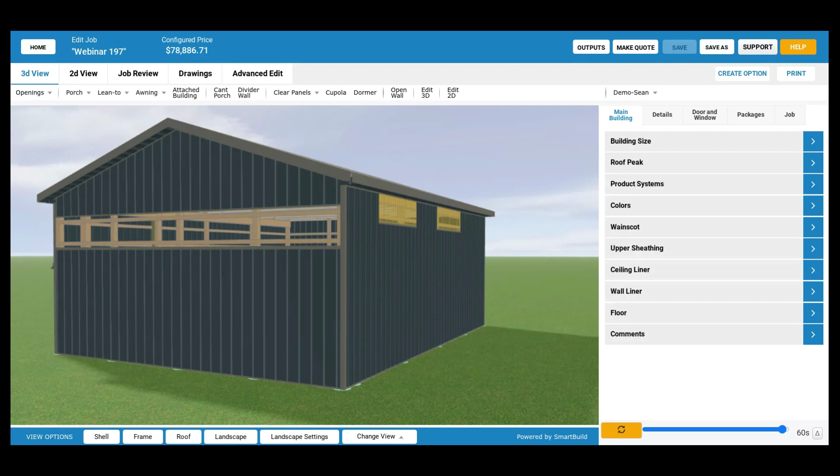Very helpful, thank you everyone who stuck around for all this feedback. We appreciate it. Yeah, it's nice to have something to work with, to be able to talk through these things. It makes it a lot easier. Yeah, sometimes you just need to implement something halfway in order for people to go, that's great. Now it needs this and this and this and this.

Yeah, good. One more thing, Lloyd. People have asked this before, I've had other questions about it, but clear ridge cap options. There is a way you can set your color. If you have the color clear, you can set a material, I would call it a new material called clear ridge cap in my settings, and use that color. And then whenever you pick your ridge cap material, you would pick that color, right?

So yeah, so clear ridge cap, you can set it. I tried it while we were on here. So Lloyd, it can be done, but there are some steps involved. It's not just as easy as this skylight thing.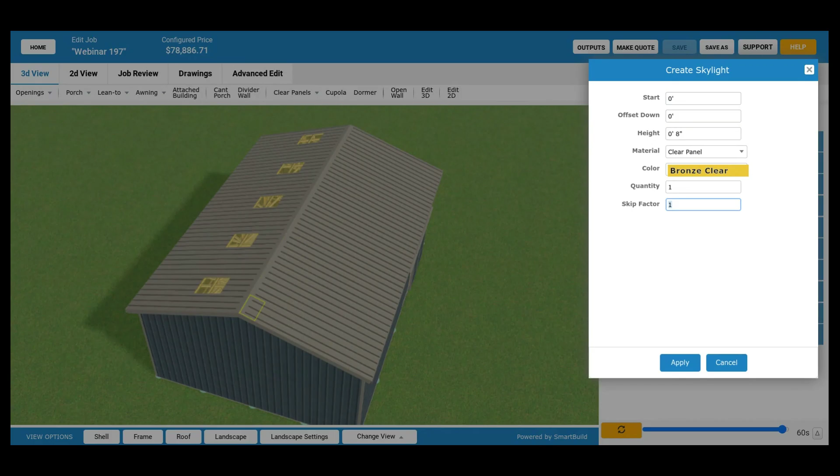Yeah, that's interesting because I've never heard anybody ask for clear ridge cap. Yeah, it is an option out there, it is a piece of material that people have. I know I've had a few customers tell me, oh, when is that happening? And I was like, I don't know, but I've tried it and it does work because it's just a color clear. Now, like you did for the sheathing material, you just have one or two colors associated with that clear ridge cap material. So when you pick that material, you can pick it for your ridge cap, and it'll come in looking clear.

It doesn't work if you try to pick a ridge cap color directly, it just doesn't quite work as well. It would be best if you just name it a different material and gave it a color. Well, it kind of has to be a different material, but yeah, exactly. So we haven't done this one before.

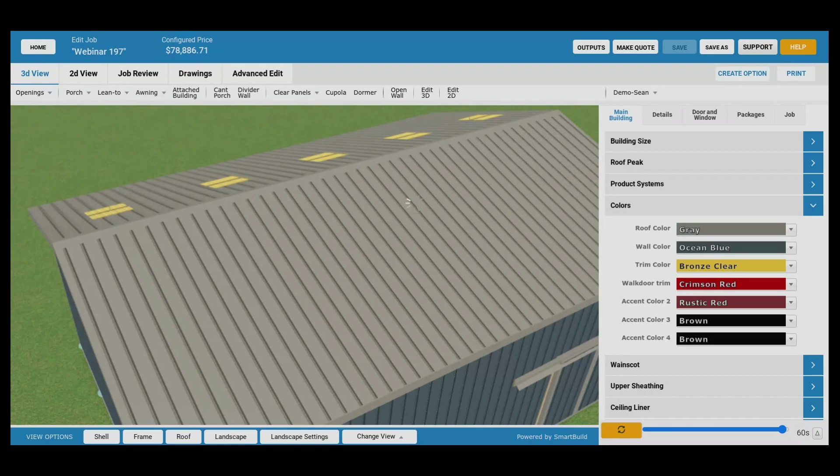There you go, you got bronze clear. You changed the trim color, but your ridge cap is still set to roof color. But you do have clear gable trim, and corner trim too. Yeah, all my trims - this is the new thing.

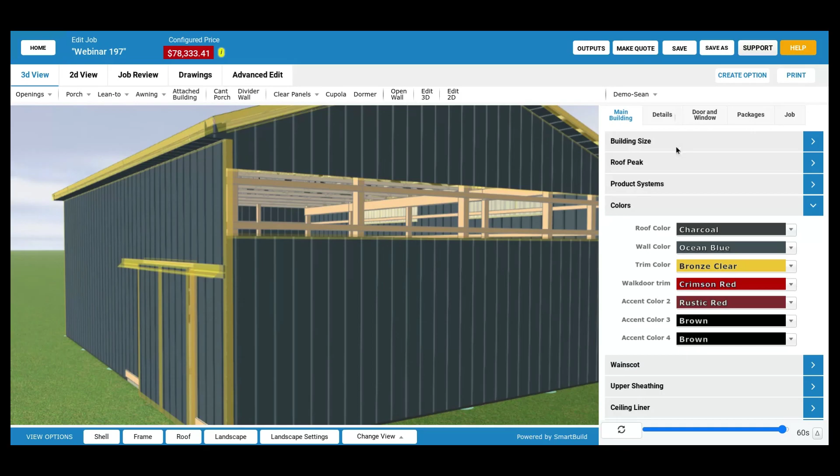Yeah, clear ridge cap options - it just works like that. That's why I said keep it. You don't want to do it in the colors. You want to do it as a separate material for your roof trim and your ridge cap, just say clear ridge cap here as a material, and then you could set the color as an accent color. I think I did, just like you did for the clear sheathing. Yeah, you wouldn't want to set your roof color to be clear.

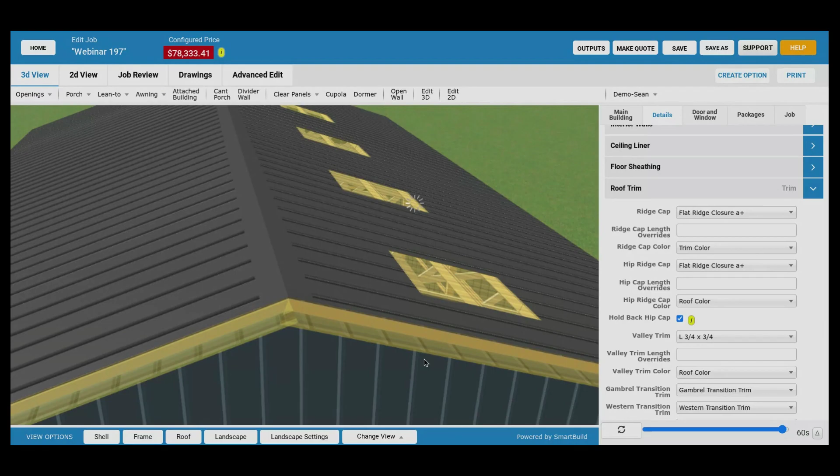So one of these would be a clear. I have to see how I did it, but it would have to be an accent color - you'd have to pick accent color for your ridge cap. Because right now your ridge cap is set to roof color, so if you switched it to trim color, your ridge cap would be clear, because your trim is set to clear. So you'll have to click there - there you go, clear ridge cap.

Lloyd asked, can the roof panels be cut short? And I believe, yeah.

That's an add-on margin, Mark. So when it comes to clear ridge cap, most people are going to want an extra run of lumber, and then the ridge cap is wider - it's actually cutting the metal down farther. So there's several things we can do if we want to support it, but it's not going to be like your normal ridge cap. I had just never heard of it - I couldn't imagine why you would want clear ridge cap. Unless you're doing a greenhouse, but even then, now your ridge board is getting sunlight on it. That's why they're wider. Most people say the roof lights we added cause too many roof leaks, so they won't use them, but they will use a clear ridge cap.

Clear ridge cap doesn't leak near as quick, so that's the stance a lot of companies take. Okay, so clear ridge cap sounds like a different animal that involves not just a different material that's clear, but also a ridge cap that causes your roof sheathing to stop 3 feet short of the peak, with some framing or distance down. Yeah, separate feature.

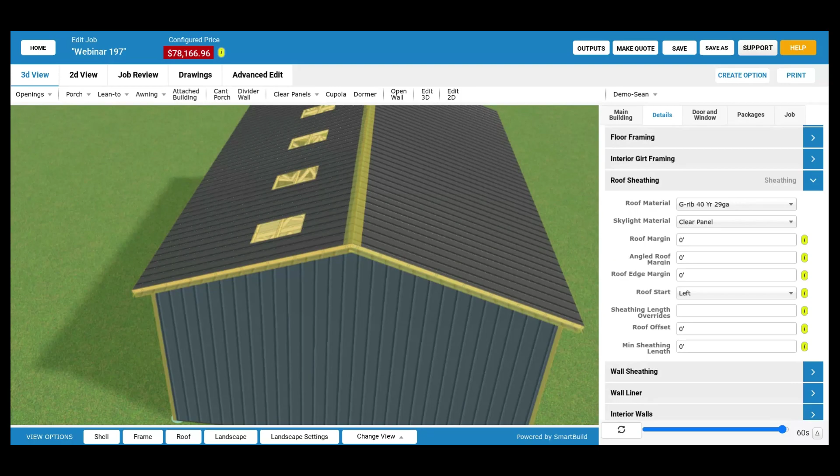Okay, we'll have to add that to the list of things to do later. Yeah, we'll get that on the list so we can kind of sort of do it, but not really. I think you could play some games with your purlin - you could control where the first purlin is from the peak. So if you made that first purlin 1.5 foot down, you can play those kinds of games, and it's under purlin framing, I believe. Make that 1 foot 6. Definitely a separate feature though.

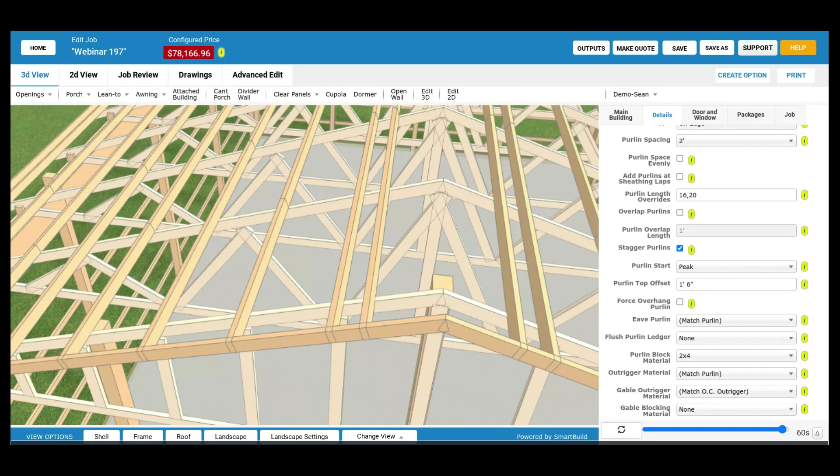And then I think you'd have to do some kind of margin on the trim, on the sheathing. I think we've talked about that before with respect to a vented ridge cap - when you have a vented ridge cap, you can't have your metal going all the way up and meeting at the peak, because then the air can't get out. So there's a gap there, and I don't think the roof sheathing margin is going to fix that. No, like roof sheathing margin - yeah, set that to 1 foot, see what happens. I think you'd have to do -1 foot, because this is not a margin, it's an add-on.

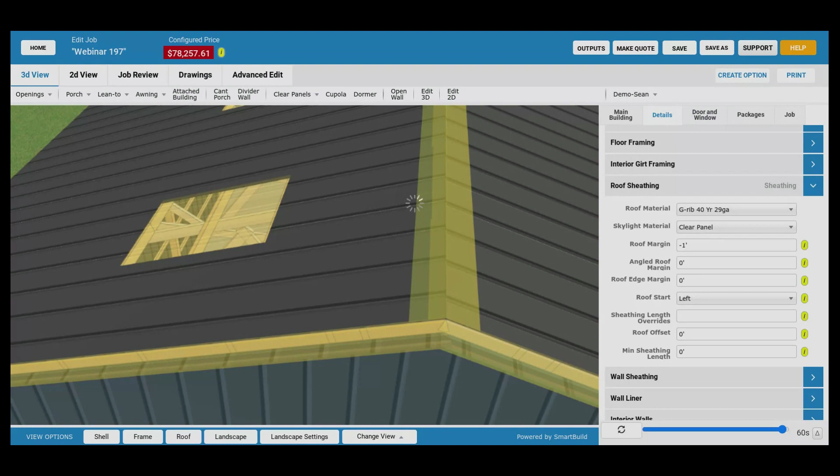We don't show it in the model, right? I didn't think so. Well, I guess we do - that's interesting, might be a little bug. It's because of that margin. No, I don't know what it's doing there, that's weird. So we can get close to it, but the bottom line is we don't support it right now.

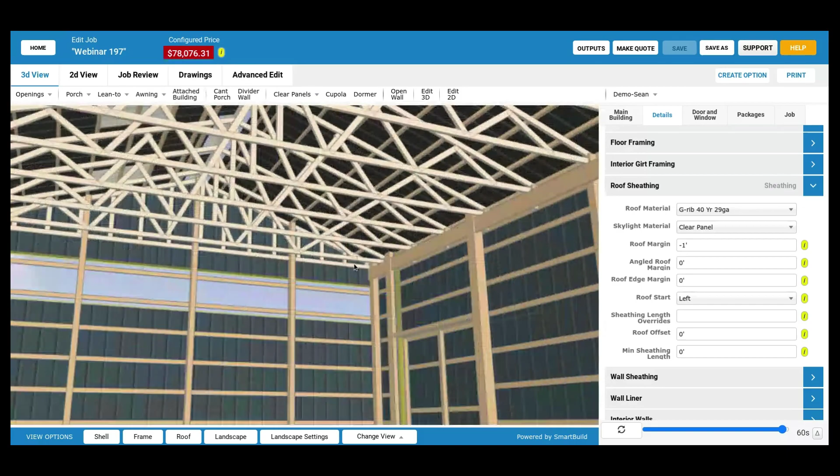Ooh, Marlon's got a good one that I know Brendan has asked for before. What we fantasized about, Marlon, is being able to go ahead and turn the frame or the shell off, Sean.

So I'll just jump in here and say what I was thinking. If you zoom in there, Sean, and hover over one of those pieces, being able to right click that piece and say not just what is this, but what are the things that are important about this? How do I change this thing?

So I could right click on that, the gable subfascia I believe it is, and right click on that piece, and it would say, oh, this is this material. It's a gable subfascia. Here's the settings you have for gable subfascia.

I could right click on a purlin, and it would not only tell me what the material is and what the usage is, but it would also tell me, oh, here's your settings for purlins. Your purlins are 3 foot on center. You can go, oh, I want it 2 foot on center. So you don't have to go searching through the details to find the setting in question. You can just click on a piece and all of the settings would come up there.

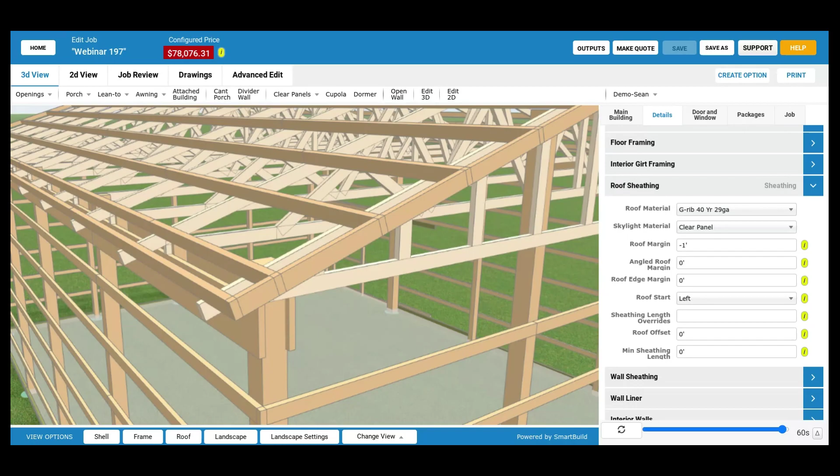That's right. Marlon, did you have one thing? Well, one thing that will happen frequently is you end up with, let's say, you put in a door or an attached building, you end up with a board sticking out, and you'll wonder, why is that there?

Another thing I was referencing is, let's say you're working with formulas and things like that. Sometimes it's hard for me to know, not being around it as long, what all the tokens mean. I might call it something totally different. I guess it's probably two different questions. As far as the tokens, that would be a different question, but the same kind of thing.

As far as looking at a part and going, why is that there, what I always do is go to the drawings. So go to drawings, like the example we were just looking at was the gable. Go to drawings, go to assembly drawing for roof 1.

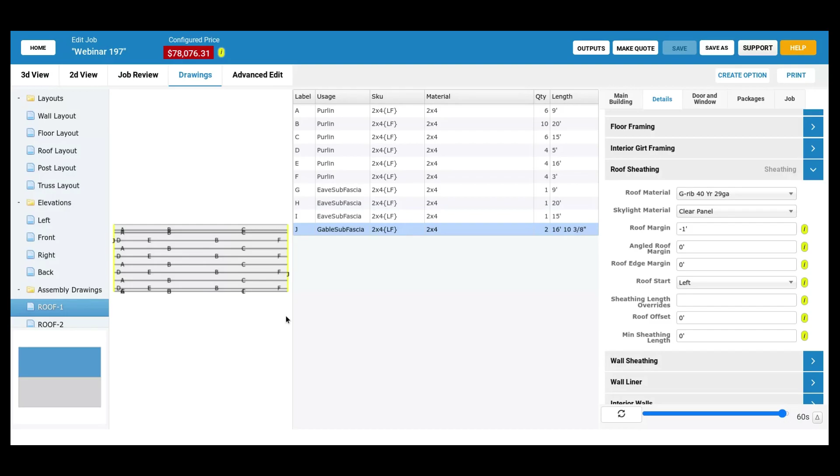And look at that piece on the end, J. Oh, that's a gable subfascia. Okay, that's what that is. Now at least I have a clue what I should go looking for. Now I can go to details and go to roof framing and look at gable subfascia and see why that is a 2x4. It's a 2x4 because I told it to be.

Would that even apply to something like posts? For instance, I recently had a situation where I had a door I was putting in the center of a building, and it wanted to put an extra post 1 foot off to the edge. If I centered the door, the post would jump to the other side if I moved it slightly over. I didn't really feel like I needed that post in my drawing. I guess you could go in there and figure out what the usage of that post is and then turn it off. Yeah, so you can see in this one, there's post and there's jamb post.

Different materials for post and for jamb posts. We got 2 jamb posts and 2 regular posts in this particular wall. What it doesn't tell you is that it's an overhead door jamb post. No, that is a slider jamb post. Okay. Looking at it gives you a start, so that at least gives you a start.

But yeah, it is something that has come up quite a bit, and I definitely wish there was a magic bullet that could help out there.

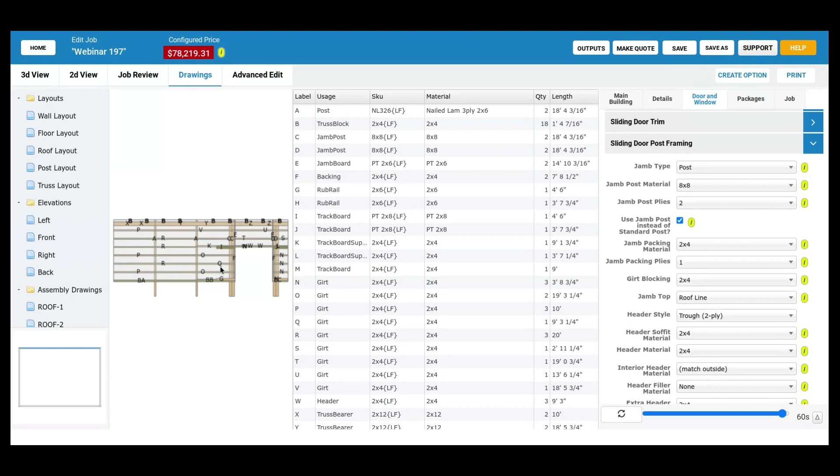And that is something that we work towards, it's called discoverability, right? It's the ability for somebody who doesn't know anything about this software to go and go, what's this? Oh, that's what that is. That's sort of the litmus test, and we don't do a very good job of that in all the places that we should.

Well, they say if you add more features, you just increase the manual. So there's that side of it too. The more power there is, the harder it is to learn it. Yeah, if we didn't have all these darn customers, this job would be a piece of cake.